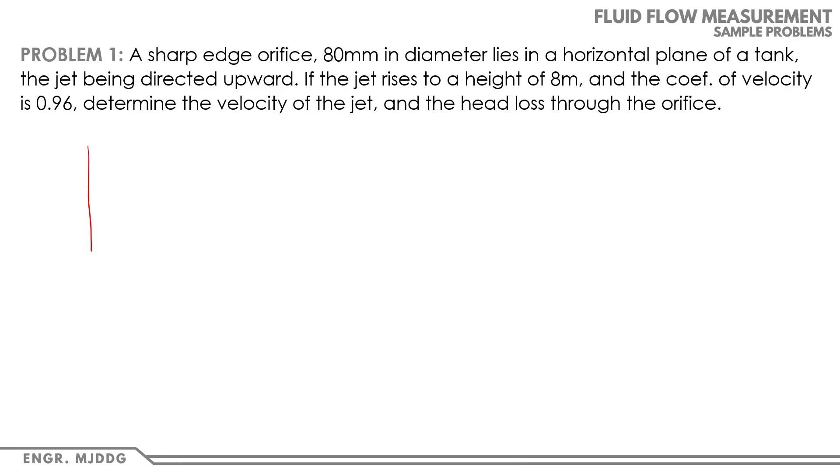First, let's draw the figure. We have an orifice lying on the horizontal plane of a tank, and the jet is being directed upward. The drawing in the book looks like this. So here is the drawing, and here is our orifice. The water comes out from here.

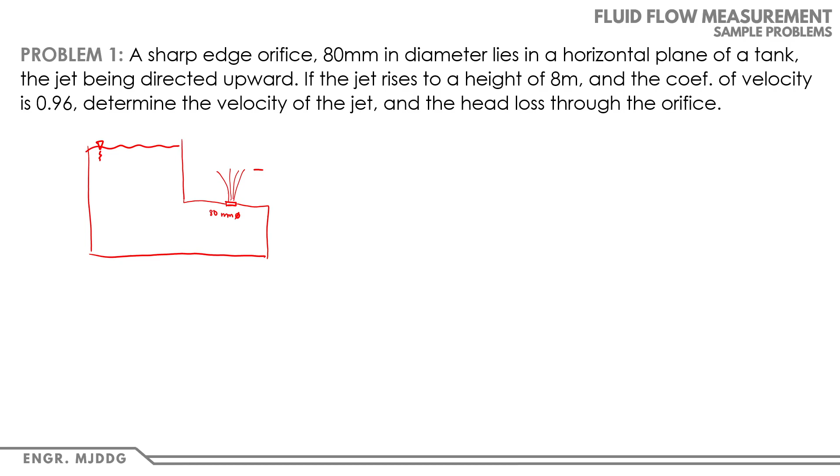The diameter of our orifice is 80 mm. The height of the water is 8 meters. Then the coefficient of velocity is 0.96.

The first thing asked is the velocity of the jet, V. Our formula is V equals square root of 2GH, so 2 times 9.81, and H is 8 meters. By the way, this is the theoretical velocity, so Vt equals 12.53 meters per second. That is our answer for the velocity of the jet.

Next is the head loss. Earlier, how did we get the head loss? This is our H, and the head loss is here. We already derived this in the previous video, which is HL equals V squared over 2G times 1 over Cv squared minus 1.

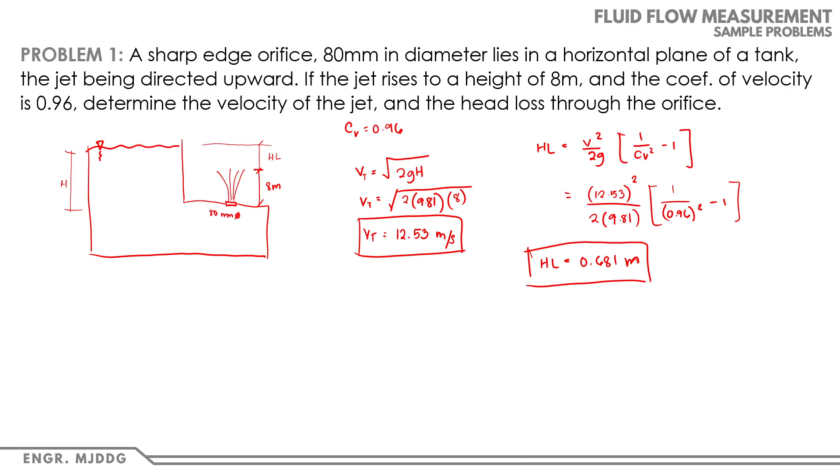For problem number 2: Compartments A and B are connected by an orifice having a diameter of 150 mm at its sides. At compartment A, the water is 3 meters above the orifice, while on B, the water is 2 m deep above the orifice. If Cc, the coefficient of contraction, is 0.96 and Cv is 0.92, determine the discharge through the orifice. That is letter A. Letter B is the head loss through the orifice, and letter C is the power loss in watts.

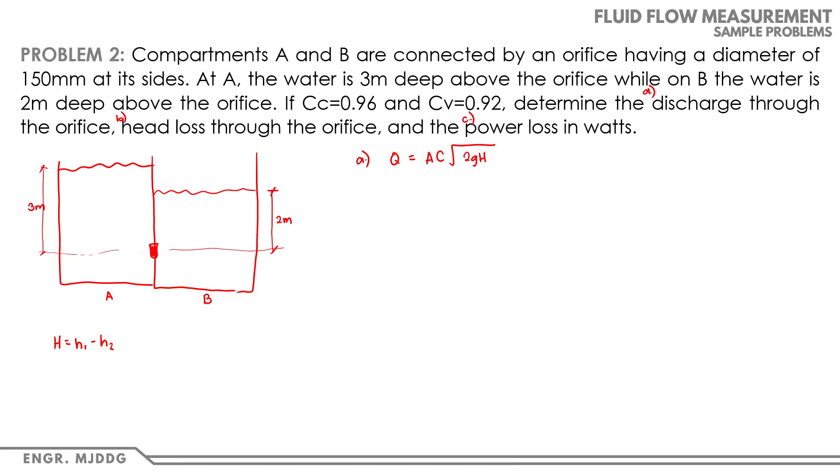But if you notice, we have 2 compartments. As we said, H is the head upstream minus the head downstream. So our H here is 3 minus 2, or H is 1 meter.

C is equal to Cc times Cv. So let's write 0.96 times 0.92, times the square root of 2 times 9.81 times our H which is 1.

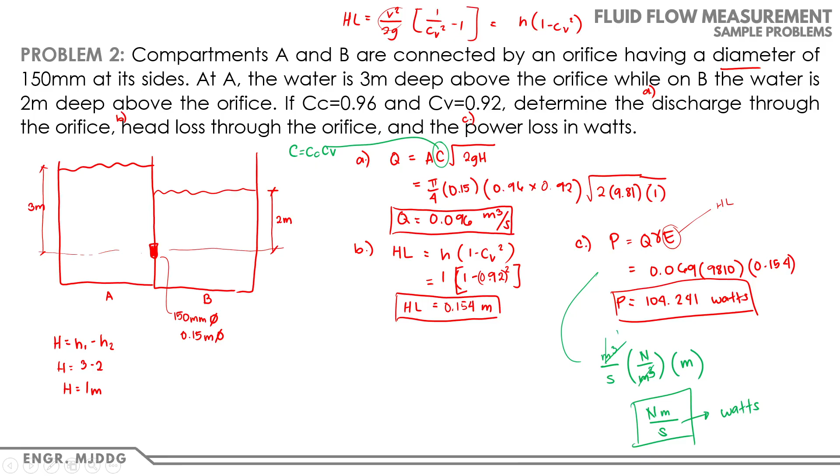So, next problem. Meron tayo dito. Compartments A, B din are connected by an orifice having a diameter of 150 mm at its sides. At A, the water is 3 m deep above the orifice, while at B, the water is 2 m deep above the orifice. So, parang kanina lang, pero dito, consider that the compartments are closed.

So, naka-close, and the pressures at A and B are 48 and 18 kPa respectively. If CC is 0.96 and CV is 0.92, determine the head through the orifice and the discharge through the orifice.

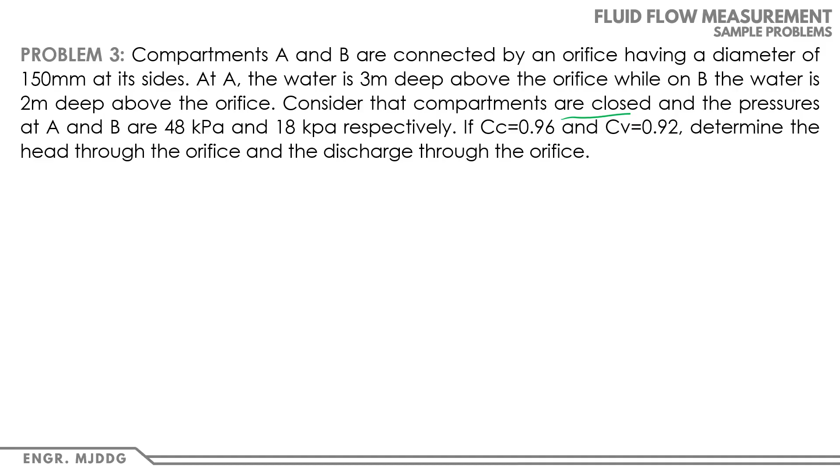So, yung drawing niyan, parang same lang kanina. So, meron tayong masakit ata sa mata pag green. So, meron tayo dito 2 compartments. Then, may orifice tayo dito. So, this is compartment A, this is compartment B.

Then, yung water sa compartment A is 3 m above the orifice. Then, yung isa naman ay 2 m, 2 m above the orifice. Then, sa compartment A, meron tayo 48 kPa. Then, sa compartment B naman, 18 kPa. So, merong pressure na kasama.

Ngayon, di ba, na-discuss ko doon sa first part ng video natin is kapag meron tayong pressure, i-convert natin siya into the height ng liquid na kasama. So, balikan natin. P, di ba, yung pressure is equals to gamma H. Then, kapag i-convert natin siya, so yung H natin magiging P over gamma. Yung gamma natin is the gamma ng liquid, which is yung liquid natin dito is water.

So, yung H1 natin, so compartment A or sa H1 is, so meron tayo ditong 3, di ba ganon? Di ba? Wait lang, sulat ko na lang. H plus, yung magiging height na natin is H plus P over gamma.

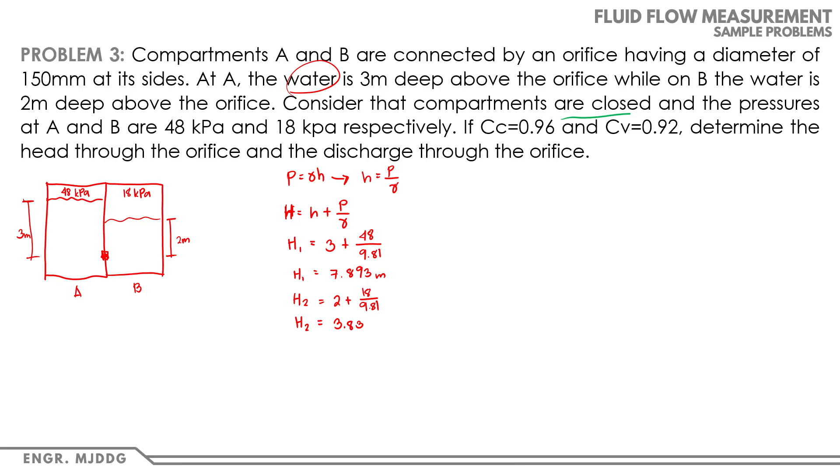3.835 meters. So, ang H natin ay H1 minus H2 or pag minus nyo na lang yan, 4.058 meters. So, yan yung ating head through the orifice.

Ngayon, kinukuha natin is si discharge. So, yung discharge natin is equals to CA square root of 2GH. So, ang C natin is, ano na ulit si C? O coefficient of discharge. C is equals to CC times CV. So, meron tayo dito 0.96 times 0.92 times pi over 4 times ang diameter ng ating orifice ay 150 mm, 0.15 squared.

Dapat ganito na, times square root ng 2 times 9.81. And yung H na gagamitin natin dito is yung nakuha natin kanina, which is 4.058.

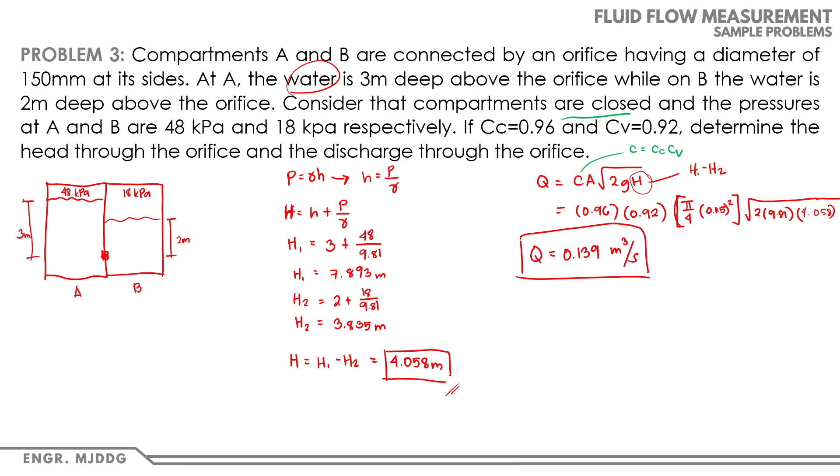Okay, so next is problem number 4. Ang sakit sa kamay mo.

So, for problem number 4, a 75 mm diameter orifice under a head of 4.88 meters discharge 8,900 Newton of water in 32 seconds. The trajectory was determined by measuring x is equal to 4.76 m for a height of 1.22 meters, so vertically.

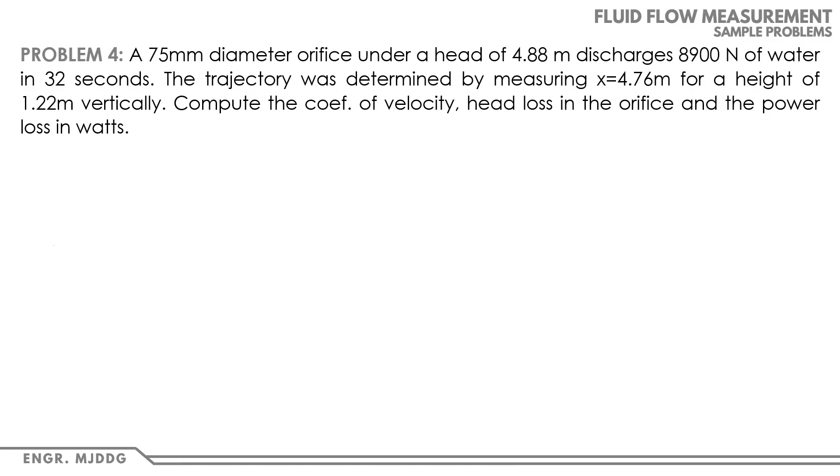So, compute the coefficient of velocity, head loss in the orifice, and the power loss in watts. So, paano yan? Ang figure niyan is ganyan. Then, may water. Ganyan. Ito yung ating... wait lang, pangit naman ang drawing ko. Ulit. Ito. Hindi kasi ako naka-straight. So, meron tayong tank.

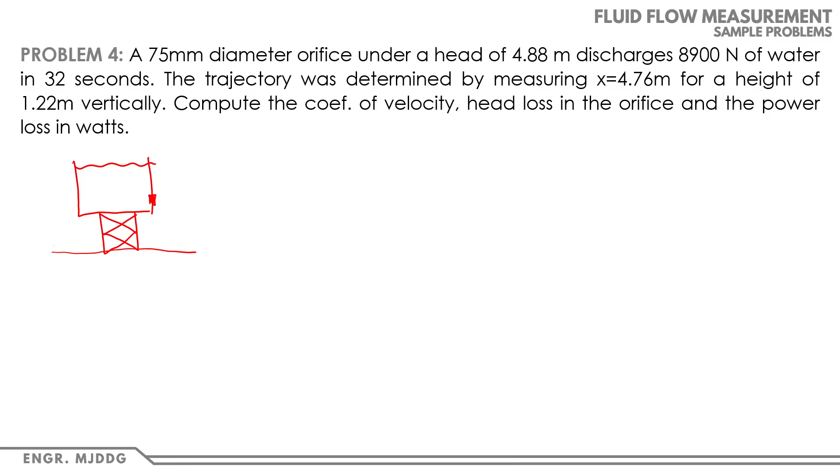Hindi pa rin straight, may water. Ito yung orifice, andito si orifice. Ang sabi, 75mm diameter under a head. So head niya is ito, 4.88 meters. Tapos nagdi-discharge daw ng 8,900 Newton of water in 32 seconds. Yung trajectory daw, ano yung trajectory? Yung pagbuhos ng tubig, so nakaganyan.

Ang x daw natin, paano natin i-measure yung x? So yung x po is from the orifice, papunta dun sa kung saan tumama yung water natin. So x is 4.76 m. Tapos yung height daw ay, ano yung height niyan? So ganun din, y is equals to 1.22 meters.

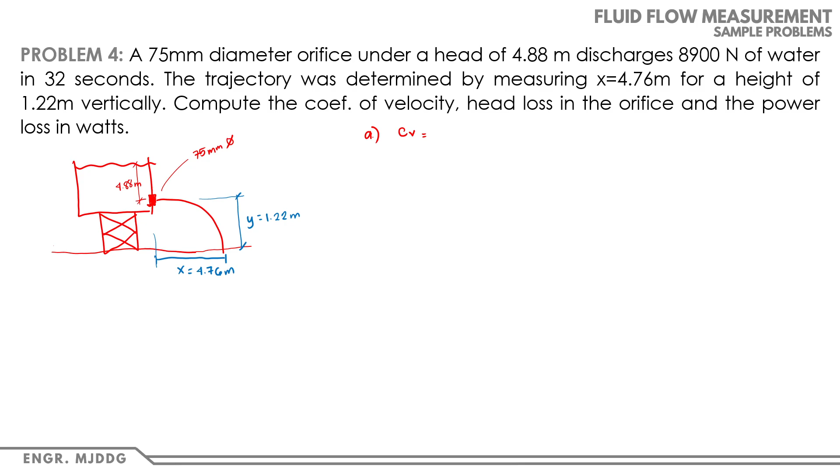So pinapakompute sa atin yung coefficient of velocity, letter A. CV. So ano na ba yung formula ng CV natin? CV is equals to actual velocity over theoretical velocity. Ngayon, for the theoretical velocity, makukuha natin yan by the formula 2GH.

So ang VT natin, 9.81 times ang height natin or head natin is 4.88. So ang VT natin dito is 9.785 meters per second, kasi velocity yan.

Pero hindi lang dyan, ano pa? Kukunin natin yung ating V or the actual velocity. Paano natin kukunin yan? Naalala nyo that velocity is equals to distance over time. Tama? Where yung distance natin dito, or d, is equals to velocity times time.

Pero yung d dito is yung x na natin, ito. So pwede natin to i-change into x is equals to vt. Pero ano?

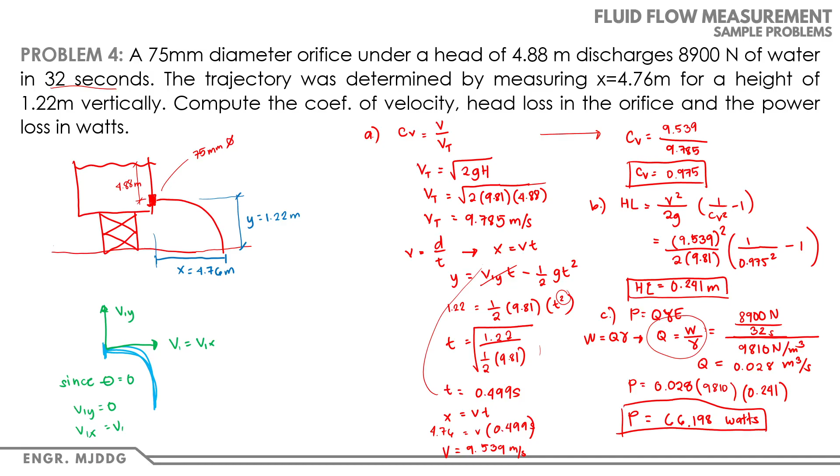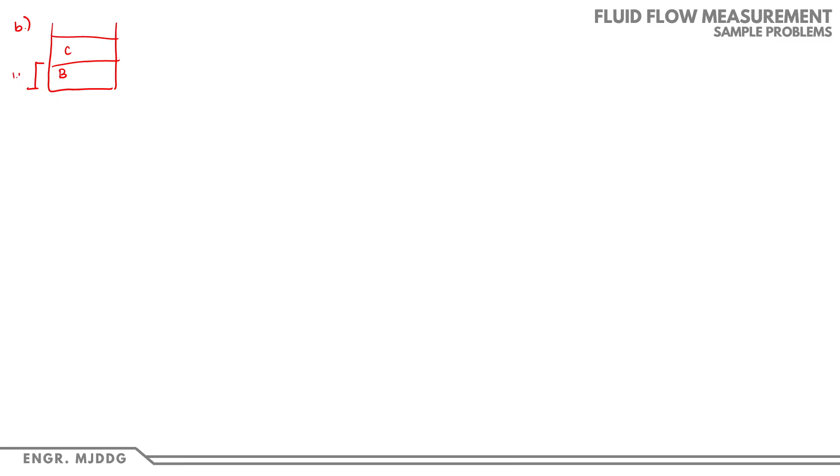Okay, medyo mahaba, masakit na yung kamay ko. So letter B, liquid B out of container after A is removed. So yung scenario na natin dito, nawala na si liquid A. So yung magiging itsura na lang is C at B na lang, kasi nawala na si liquid A, na-remove na si liquid A. So magiging 1.5 to, tapos ito naman ay 2 meters. So meron tayong orifice dito. Then ito yung nag-flow na water.

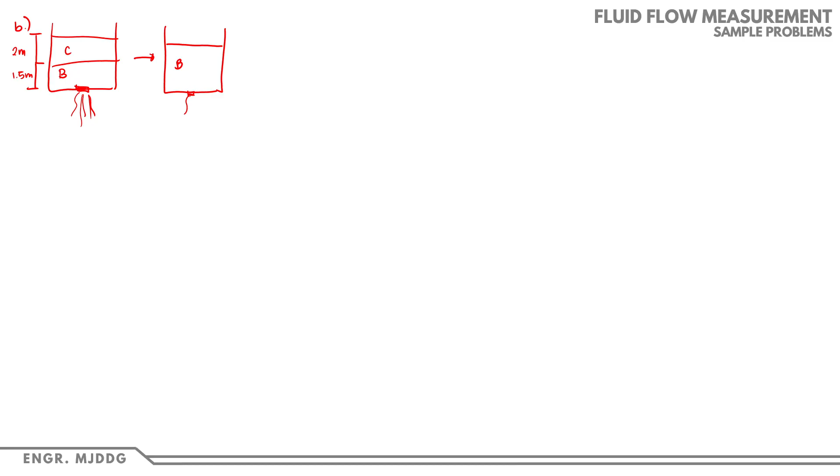Okay, so ang gagawin natin is i-convert natin siya sa iisang liquid lang, which is liquid B. So B, yan na lang, magiging liquid. Tapos ito, ilan na to? 0.8, tama ba? Tapos 0.9. So HB equivalent C is equals to HC times gamma C over gamma ng B. So yung HC natin is 2, times gamma ng C natin is 0.8 over 0.9.

So ang HB equivalent C natin ay 1.78 meters. So ang HB total natin ay HB plus yung kinonvert nating liquid C, HB equivalent C. So 1.5 plus 1.78 meters. So ilan to? 3.28 meters. Dulas na kasi yung kamay ko. Wait lang.

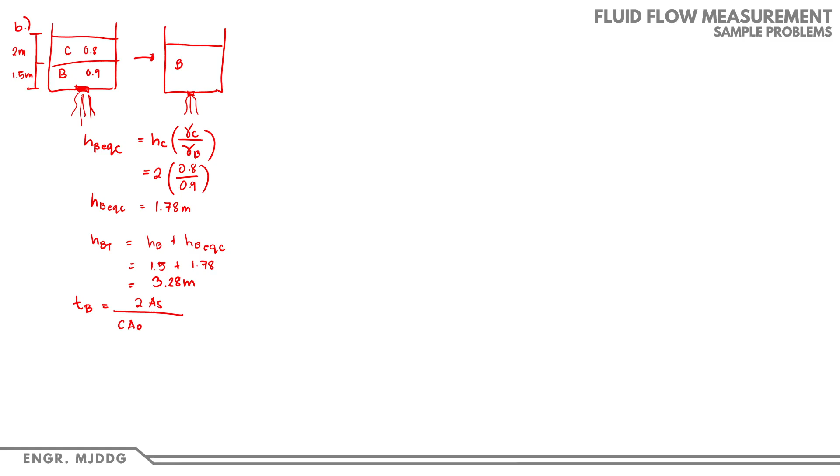Okay, so meron na tayong HBT. So TB, time to remove liquid B, ay 2 AS. Sige, lagay natin yung formula. 2AS over CAO square root ng 2G times square root ng H1 minus square root ng H2. So yung TB natin is 2 times AS, pi, kanina nakuha natin. Then yung C natin, 0.6. Yung AO natin, 0.1 times square root ng 2G na 9.81 times yung H1 natin, yung total, square root ng 3.28 meters minus H2 natin is 1.78.

Tama ba? Wait lang. Tama. So paano nakuha si H2 ulit? So si H2 ay yung 3.28 minus ilan yung aalisin? 1.5. Kaya naging 1.78. Ito, aalisin natin si ito. So si TB natin ay equal sa 11.275 seconds. So yan yung ating answer for letter B.

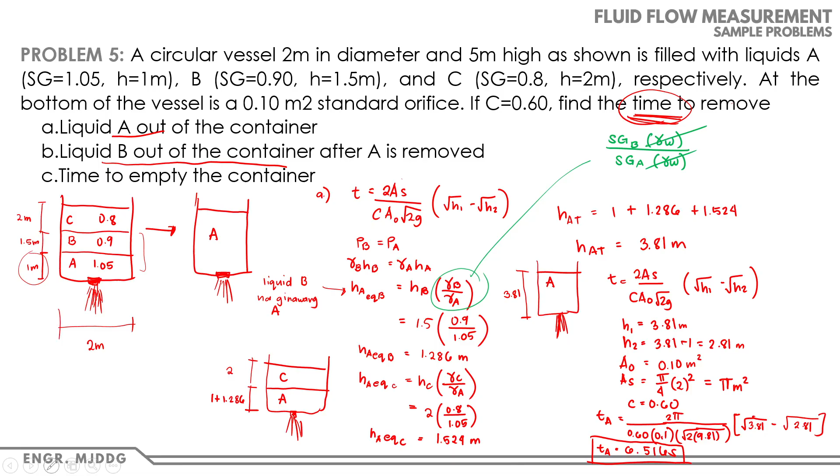O ngayon, kunin muna natin yung time to remove liquid C. So i-convert pa ba natin? So hindi na, kasi iisang type na lang yan ng liquid. So TC is equals to, para ma-memorize ulit, 2AS over C, AO, square root ng 2G, times square root ng H1 minus square root ng H2. So TC natin is equals to 2 pi over 0.6 times 0.1 square root ng 2 times 9.81 times square root ng ang H1 natin is 2 minus square root ng H2 natin. Yung magiging height 2 natin, syempre pag lumabas na lahat, so 0 na, wala nang natira.

0. So TC natin is equals to 33.434 seconds. Yan ba yung sagot? Hindi, kasi ang tinatanong, time to empty the container. So yung T total natin ay equal lang yan sa TA plus TB plus TC. So yung TA natin kanina is 6.516 plus 11.275 plus 33.434.

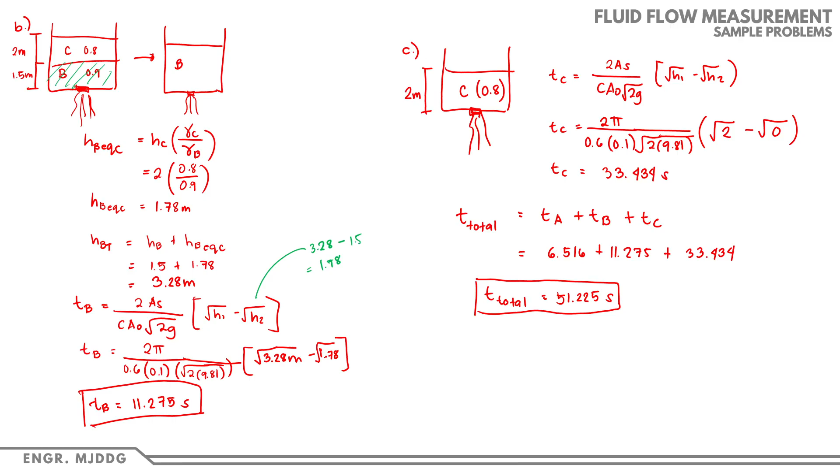Wala yung mga kalkyo ko. Wait lang, kalkyo ko lang. 6.516 plus 11.275 plus 33.434. So 51.225 seconds. So ganyan, ganyan kabilis ma-empty yung tank. So 51.225 seconds. So muntik nang mag 1 minute. So yan yung ating answer for letter C or number 5.